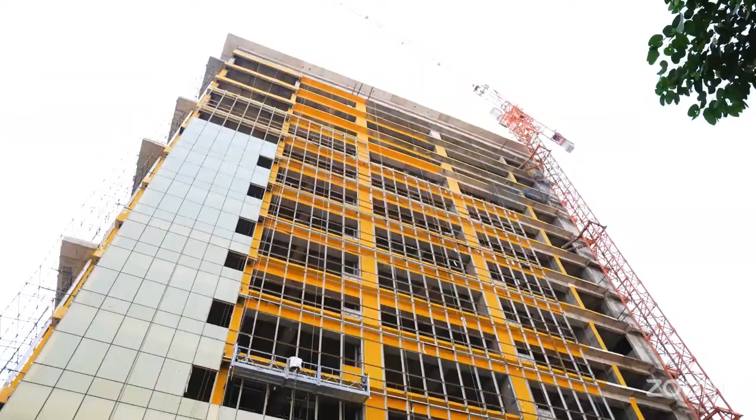The Indian Association of Structural Engineers, also known as IAStructE, was conceptualized and constituted in the year 2002 by a group of senior professional structural engineers from all over the country. IAStructE is registered under the Society's Registration Act 21 of 1860. IAStructE is a national apex body of structural engineers in India with a mission to promote structural engineering profession and cater to the professional needs of the structural fraternity. In the short span of 2 decades, the association has attained an eminent position in the professional field. Its membership is valued very highly in the profession.

Since inception, IAStructE has been led by eminent structural engineers like late Shri Mahendra Raj, late Shri Kumar Ghosh, Shri Subhash Chand Mehrotra, Professor Mahesh Tandon, Shri Alok Bhaumik, Shri Manoj Mittal and Professor R. Pradeep Kumar as its president.

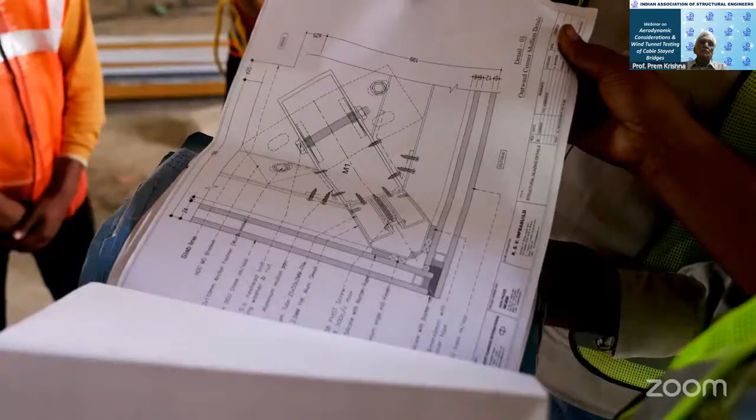IAStructE is a permanent member of Engineering Council of India and interacts with the government on professional and policy matters related to civil and structural engineers. To expand its reach, IAStructE has collaboration with various international professional like-minded associations and institutions.

IAStructE's prime objective is supporting and protecting the profession of structural engineering by upholding professional standards and acting as a mouthpiece for structural engineers in India. IAStructE endeavors to ensure that its members develop the necessary skill in structural engineering and work to the highest standards by maintaining a commitment to professional ethics and standards.

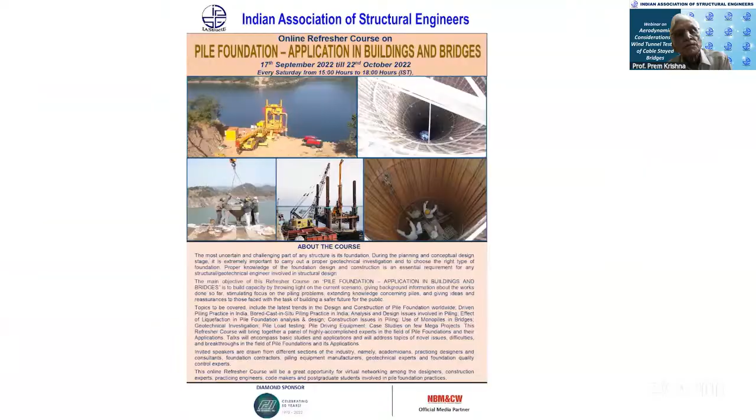IAStructE is actively engaged in organizing several continuing professional development (CPD) courses for structural engineers to help them update their knowledge and advance their career paths. It also conducts refresher courses for young and practicing engineers and student-oriented programs. Seminars, workshops, conferences, technical lectures and discussions related to the latest technological advancements and case studies are also organized regularly for members to enable them to continuously update their knowledge and skill set by interacting with the best minds from the industry. IAStructE's activities are widely appreciated and known for quality technical contents.

IAStructE is also actively engaged in publishing its quarterly journal Structural Engineering Digest (SED), code commentaries, professional guidelines, and a monthly newsletter. IAStructE's publications are becoming popular with time. IAStructE has representation in various technical committees of BIS and IRC as well. Its members are actively contributing to National Code Formulations.

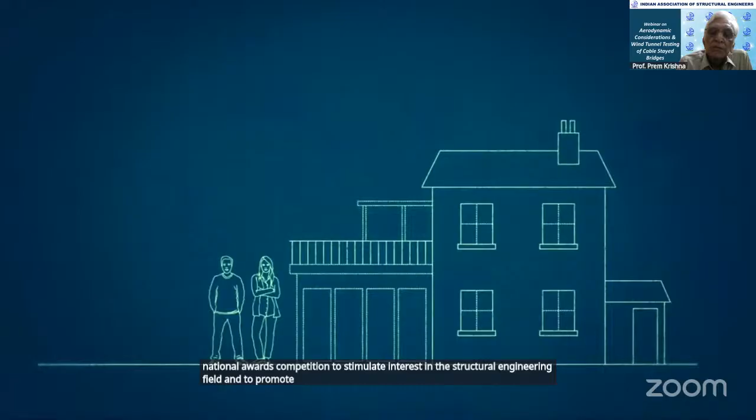In the year 2020, IAStructE started National Awards competition to stimulate interest in the structural engineering field and to promote innovative thinking and creativity. The awards are presented to the winners in recognition of their outstanding contribution to structural engineering in the categories which include Outstanding Structure, Outstanding Structural Engineer, Outstanding Woman Structural Engineer, Promising Young Structural Engineer, and Best Master's Thesis in Structural Engineering.

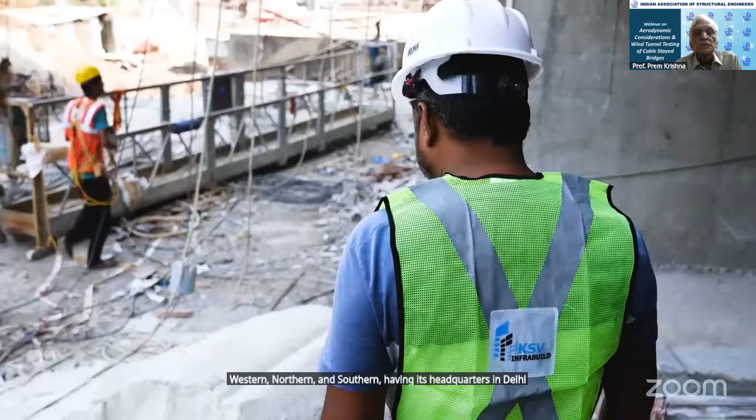IAStructE is currently operating from 4 regional centers, namely Eastern, Western, Northern, and Southern, having its headquarters in Delhi to inculcate the professional culture and provide handholding to the budding engineers. IAStructE has its student chapters in several leading engineering institutions as well.

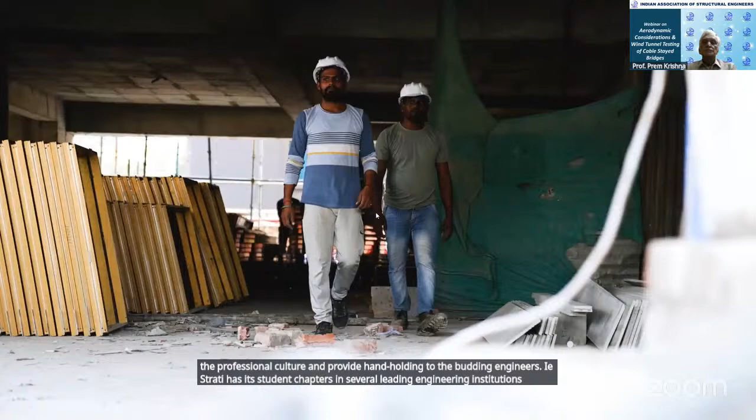Membership of IAStructE is open to all civil and structural engineers engaged in structural engineering profession. Members are elected based on their qualifications and experience in different grades as per eligibility requirements prescribed in the bylaws. Each application is carefully scrutinized before electing the members. More information about IAStructE is available on its website www.iastructe.co.in.

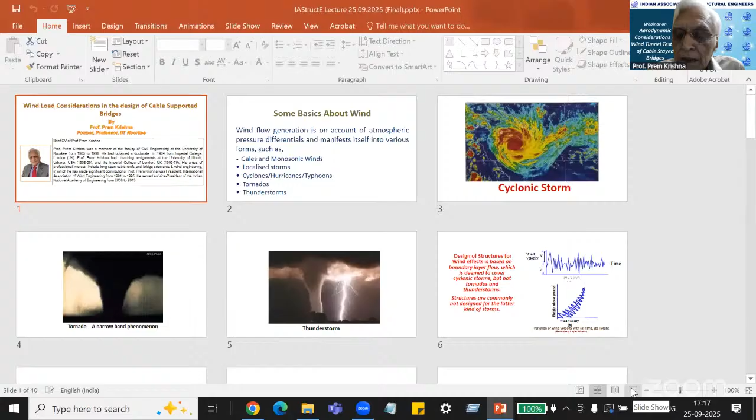The real exciting part will come when Dr. Suresh will elaborate on some of the things that I mentioned, and he will also give you some very interesting information about the wind tunnel testing of cable stayed bridge models. So let me begin. I think that part has been taken care of by Mr. Hegde already. So I go to the next slide.

Well, wind generation is something which occurs over the sea mainly, particularly as far as cyclones and hurricanes are concerned. Of course, there are also inland storms, as I've listed here. All kinds of storms I've listed: gales and monsoonic winds, localized storms and cyclonic winds. Tornadoes are inland development, and thunderstorms.

By and large, as far as India is concerned, we are affected by gales and monsoonic winds, localized storms, dust storms, cyclones. Tornadoes and thunderstorms are comparatively much less of an activity on the Indian subcontinent. So that's generally the various kinds of windstorms that we have. And as I said, of concern to us more are the first three types.

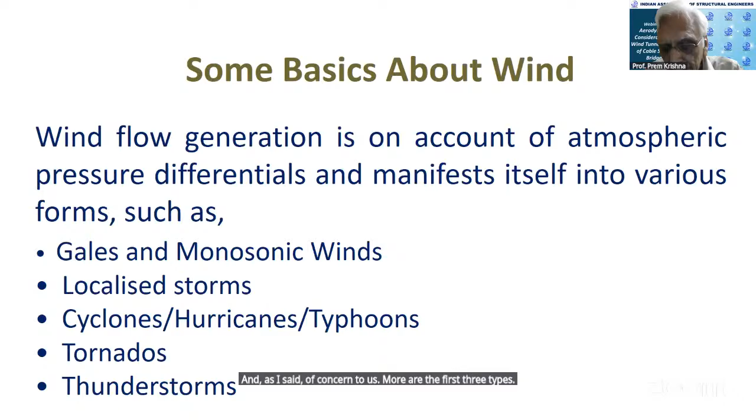Then you have a tornado, which I've called a narrow band phenomenon, which is more or less an inland phenomenon. This also has circulatory motion of wind. The difference between a cyclone and a tornado, very broadly, is that a cyclone is a wide band activity. It can cover an area of 800 to 1,000 kilometers at a time, whereas a tornado is a few hundred meters, if at all. So it's a narrow band activity. Also, it doesn't travel very much, whereas a cyclone has a much wider coverage. And that is why it is of so much concern as far as the destructive capacity of a windstorm is concerned.

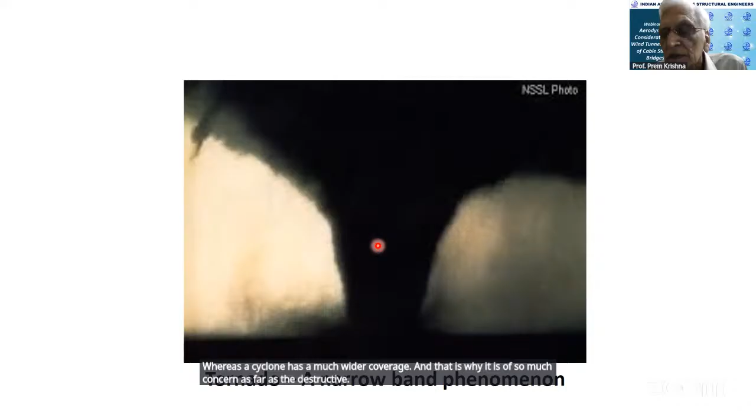On this slide, you will see a trace of wind velocity, which is my patent picture. I've been showing it again and again. If you measure wind velocity at a certain point, this is the kind of trace that you get, fluctuating up and down, above and below a mean line. So wind velocity is a fluctuating phenomenon.

And if you look at the variation of wind velocity from ground upwards, then you get a mean like this, as shown here, and up and down about this mean is of course a fluctuating component. But mainly I'm showing this figure to show that this is the way it grows from the ground towards a certain height, which we call the gradient height. The gradient height will vary and it will depend upon the type of approach terrain that you have. It may be 200 meters above ground, or it can go up to 500 meters.

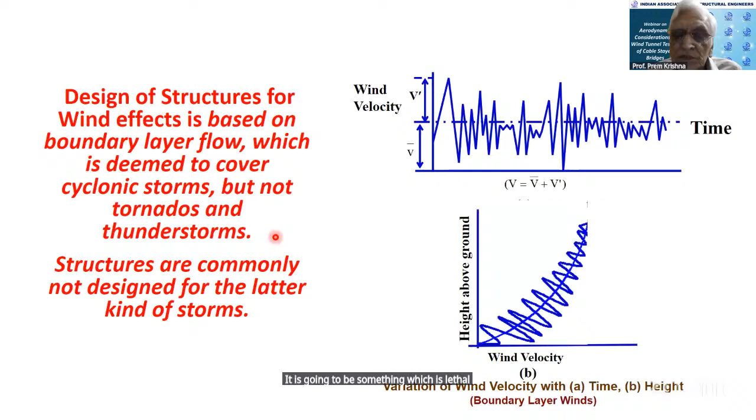So, as you have noticed from that graph there, wind is a natural randomly varying dynamic phenomenon which evokes a dynamic response from any structure, big or small, when it obstructs the flow of wind. The only difference is that for stocky structures, the dynamic component is small and it may even be negligible. And therefore, you can go for a quasi-static design approach for stocky structures, small in height and wide coverage.

The more flexible, longer span structures, such as the ones that we are dealing with today, cable bridges, depending upon their span, will exhibit dynamic response, and this dynamic response is substantial. And such structures are termed as wind-sensitive structures. So you have two types: stocky structures, which will exhibit much smaller aerodynamic response, and wind-sensitive structures, which have a predominantly aerodynamic response, which we have to take care of.

In general, this is a very simple equation that we see here. The force due to wind is obtained as a coefficient C multiplied by the pressure multiplied by the area on which the wind is impinging. P is equal to half rho v squared. Rho is the mass density of air. V is the velocity with which the wind is impinging on the structure. And this is something which we can get from the Indian Standard 875. The values of wind velocity for different zones in the country are specified in the Indian Standard 875.

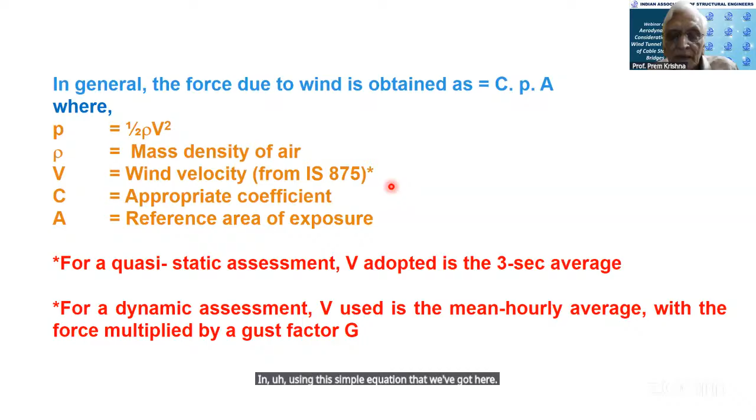The design of cable bridges is an iterative process, just like any other structure. You know that. You assume certain sizes, you assume certain forces. In fact, on that basis, if you have the sizes, then you can estimate the forces. Forces are specified. And then when you design the structure, there may be need to revise the design. So this is the process of any kind of structural design that I'm mentioning in a general way.

So can I get, what happened there? What exactly you want, Professor? I think I'm seeing your screen. It has come in front of my slides. My screen, I have not shared anything. You can request multiple presenters to share. Also, you can go to the view option, maybe it has changed. We are able to see your PPT, by the way. Yes, PPT is visible. I can't see my people. I think you can stop sharing and share again. I'll stop share and share again. Okay, yes, that would be better.

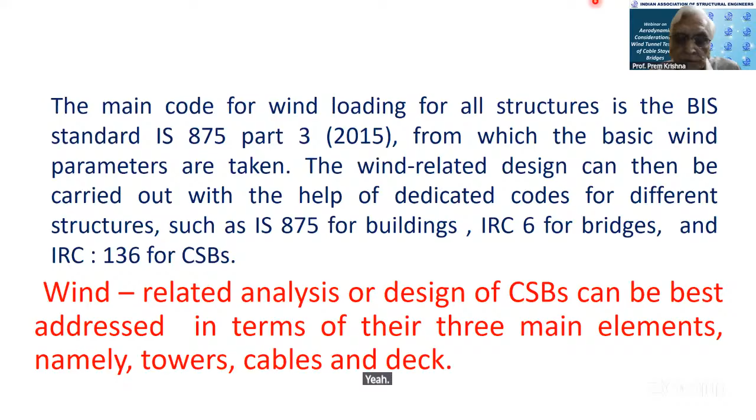Towers first. Wind effects on towers can generally be treated akin to any tall tower, as per the provisions of IS 875 Part 3. For short or stocky towers, satisfying the conditions given below, height upon lateral dimension less than 5, and frequency of vibration more than 1 Hz, a quasi-static approach is followed. And you saw that equation which I shared with you earlier that can be used. The various kinds of coefficients can be found in the code.

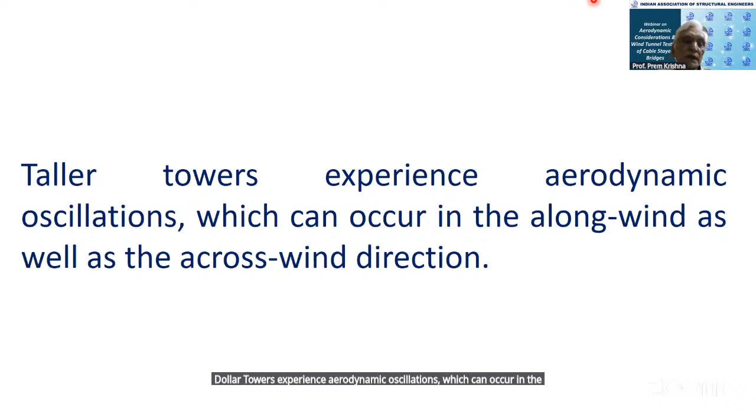Taller towers experience aerodynamic oscillations, which can occur in the along wind as well as the across wind direction. We have a picture here that will indicate that. If wind is blowing in this direction, then this is a crosswind oscillation occurring here. And this is the along wind response.

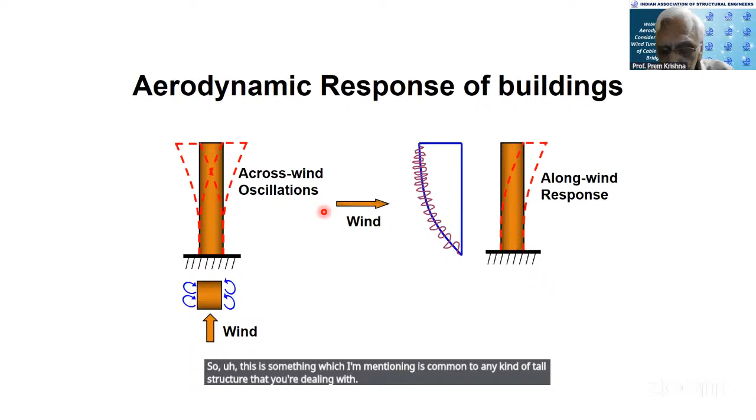The along wind response for towers, chimneys, and structures like that is monotonic in one direction, and the across wind oscillations are across the axis of the structure. So this is how this oscillates, and both can be very important for the design of the tall structure. This is common to any kind of tall structure that you're dealing with. Then we come to cable stays, which are special to cable stayed bridges.

The dynamic response for along wind is computed on the basis of the mean hourly wind velocity and is multiplied by the gust factor G using formulations given in IS 875. The dynamic response for the crosswind direction is computed by using formulations likewise given in IS 875.

It is noteworthy that towers in cable stayed bridges particularly should be examined for their safety against wind at different stages of construction. This is very important, that a cable stayed bridge, being a long span, flexible structure, as it goes through the various steps of construction, has to be examined for its safety against wind, both static as well as aerodynamic.

Now, wind-induced cable vibrations. If it were a matter of a short cable, of course, you can again go back to that same basic equation and compute the force on the cable. But in cable stayed bridges the stays can be pretty long. Just to share a figure with you, suppose you have a 1,000-meter span cable stayed bridge. The length of the cable could be as long as 600 meters. So imagine the length of the cable.

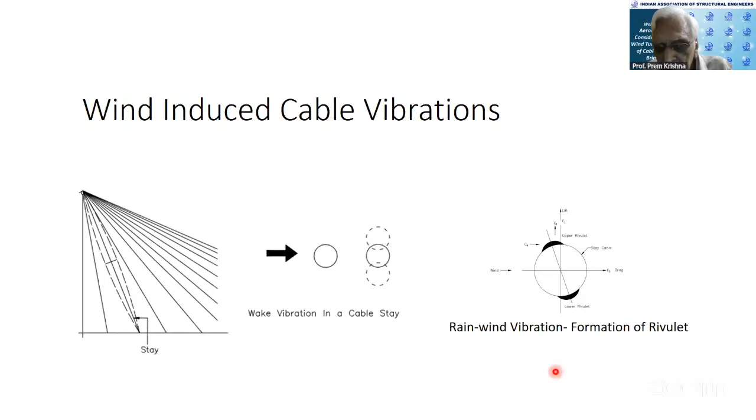Let us just see certain more stipulations about this. For short cables, I have repeated the equation that I've used above, only except to say that the appropriate coefficient we were talking about, C, is here the drag coefficient, and the value of this drag coefficient is between 0.7 and 0.8. Now, for longer cables, as I've just mentioned, what we use is the mean hourly average with the force multiplied by a gust factor G, and the order of that gust factor is 1.2. So that is how you can compute the forces on a cable due to wind.

Now, rain-wind oscillations occur when typically the frequency of vibration of the cable is between 1 and 3 Hertz, the wind speed is between 3 and 18 meters per second, and the angle of incidence is 30 to 80 degrees from perpendicular to the cable. So these are broadly the guidelines of the frequency of vibration, the speed, and the angle of incidence. And if these are satisfied, then you will expect to get rain-wind oscillations.

Rain-wind oscillations can be avoided if the Scruton number is greater than 10 for smooth surfaces and is greater than 5 for textured surfaces. Sometimes the surfaces of the cable are textured, and in that case, if the Scruton number is greater than 5, then you do not expect to get rain-wind oscillations. It is advised in the IRC 136 that cables longer than 80 meters should normally be checked for the possibility of rain-wind oscillations.

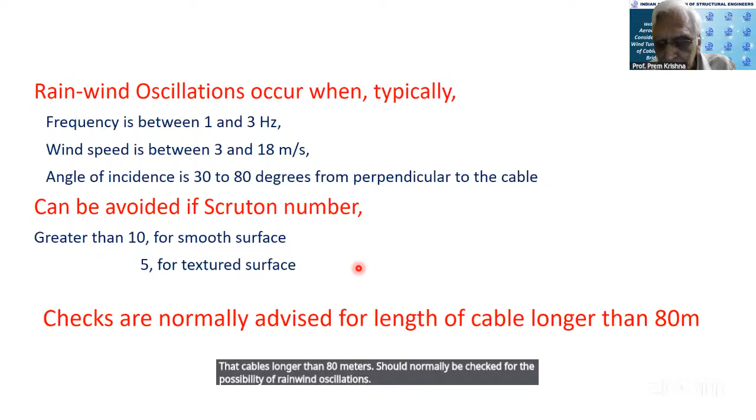Wake galloping, like the one I've shown in the slide there, is likely to occur when the distance between the cables is between 2 to 5 times the diameter. And if the distance is not in this range, then it is unlikely to occur. So that's the wake galloping.

Now we come to the deck. And if I may say so, and I think Dr. Suresh will also emphasize this in great detail, the aerodynamics of the deck in these long span bridges, the cable stayed bridge types, is perhaps the most important aerodynamic phenomenon for cable bridges. And it is there that much of the attention is given to ensure that the bridge will remain within safe limits as far as aerodynamic effects are concerned. It is not that you ignore cables and towers, but the deck is perhaps the more important element of a cable stayed bridge, which has to be examined from this point of view.

The bridge deck has three prominent modes of vibration: vertical, transverse, and torsional. Often also in cable stayed bridges, the frequencies of vibration can be very closely spaced. And coupling of flexural and torsional modes of vibration, if they are close to each other, can lead to the possibility of flutter. And in examining decks for aerodynamic stability, flutter is a very important word. You have to avoid it like you avoid taking poison.

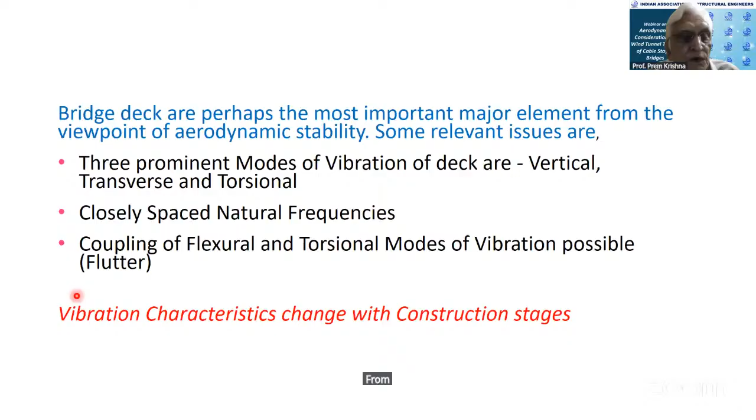As I mentioned earlier, vibration characteristics change with the construction stages. And therefore, the checking on the stability of the bridge from the wind point of view has to be done at different stages. Wind forces on a typical bridge deck, these equations are given here: the drag, the lift, and this is the torsional moment. And this is the simple equation, which is more or less a repeat of what I've written in earlier slides.

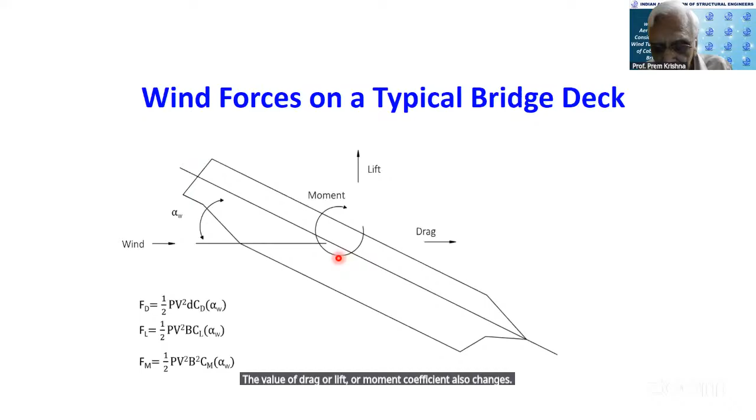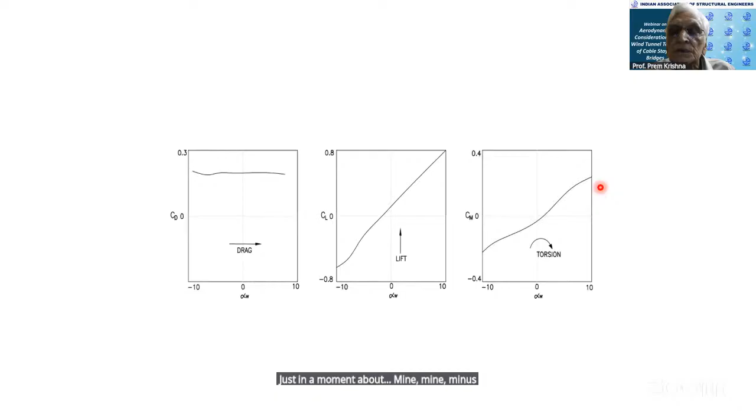Here, for a deck, the variation of drag is given. This is how CD varies with the angle of incidence alpha W. So as this changes, the value of drag or lift or moment coefficient also changes, and the variation is given here. From minus 10 degrees to plus 10, it varies from about minus 0.85 to about 0.8 here. Torsional moment from about minus 0.2 to about plus 0.2. The drag about 0.2. This is the variation for a typical case. Don't say that the variation is going to be the same on all kinds of decks. This is for a typical case.

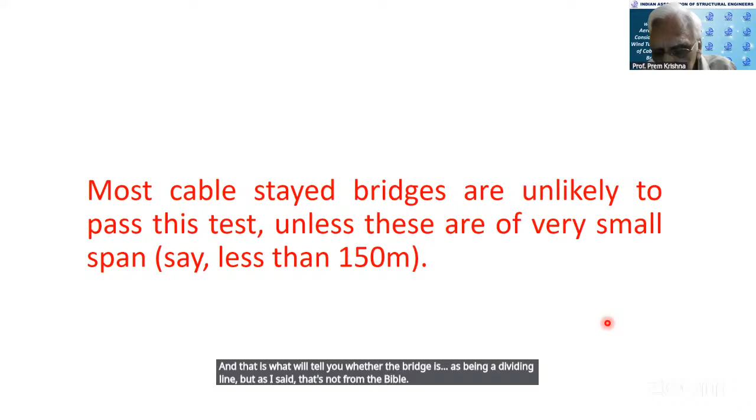If the possibility of aerodynamic actions is indicated, you carry out a dynamic analysis of the bridge, if perhaps you have not carried out already. Vortex-induced vibration amplitudes, flutter speeds, etc. can be computed at this stage using IRC 136. And design modifications can be introduced at this stage also, if necessary, to make the design more acceptable aerodynamically. So that's the first stage.

Then you have these equations, which I think Dr. Suresh will be talking about. From this, it is stipulated that if this parameter PB is between a certain range, the bridge is prone to aerodynamic oscillations. If it is greater than 1, then the bridge is highly susceptible to aerodynamic oscillations. And if it is less than 0.04, it is not susceptible.

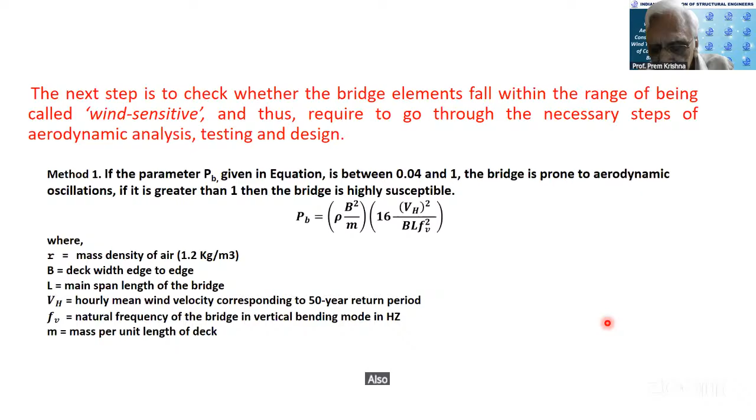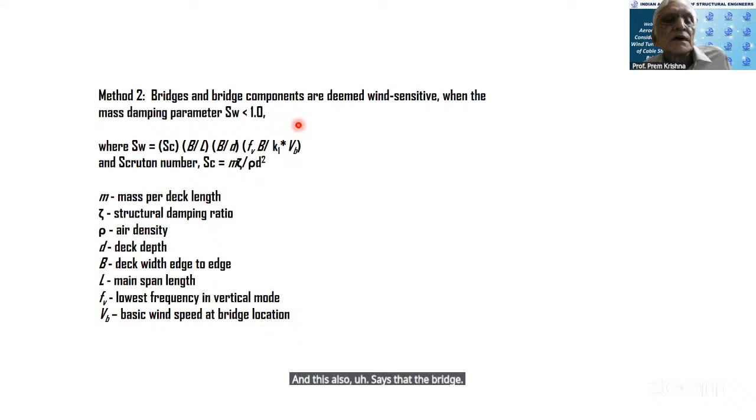Also, another method is given. And this also says that the bridge components are deemed wind sensitive when the mass damping parameter SW is less than 1. So these two empirical expressions can give you an idea of what to expect as far as the aerodynamics of the bridge is concerned.

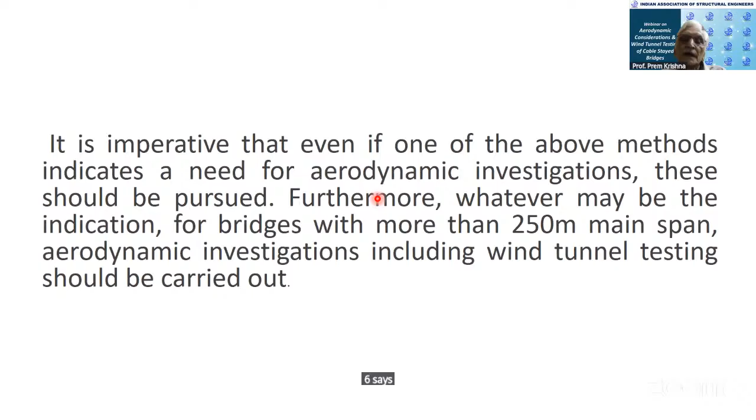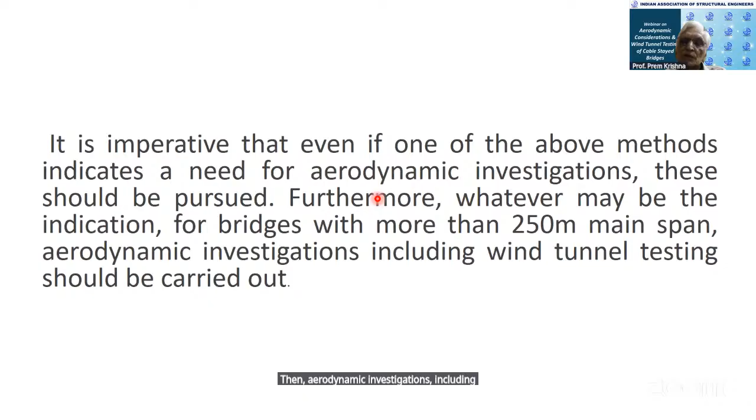Now the IRC 136 says that even if one of the above parameters indicates aerodynamic sensitivity, then further investigations have got to be pursued. Furthermore, it specifies that whatever value you get from those equations, if the span of the cable stayed bridge is more than 250 meters, then aerodynamic investigations, including wind tunnel testing, should be carried out. That is what is specified in the code.

Also, if a bridge site is windy, such as locations on the coast of India or the hilly regions where deep valleys can experience accentuation of wind speed, it will be prudent to carry out a wind climate assessment, which will provide more detailed information on the wind climate around the bridge site. The project should, in such cases, consider aerodynamic investigations, including a wind tunnel study, even for spans less than 250 meters. The intention is not to err on the wrong side. If you have to err or do more effort, you go to the safer side.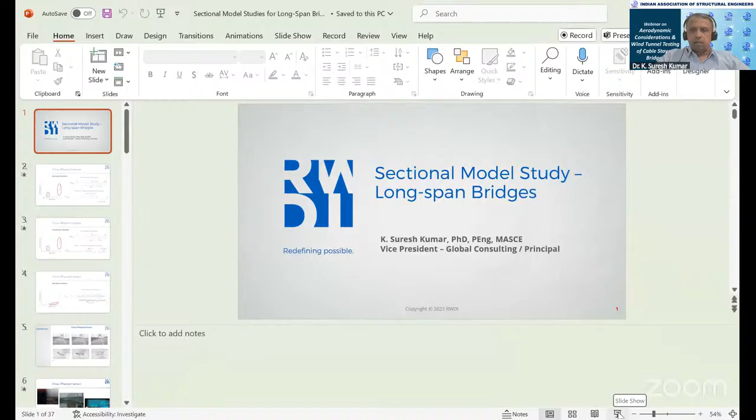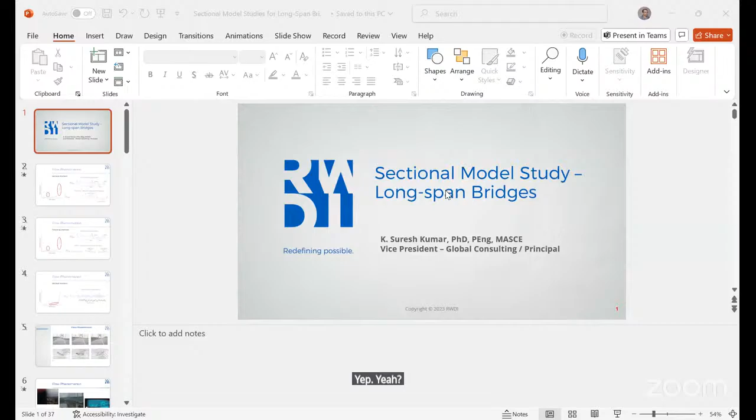Thank you, thanks everybody, I hope you can hear me. Thanks for the kind introduction and for remembering our days for Anji Khad Bridge, which is long back. It's a great honor to present after Professor Prem Krishna. He's the one who asked me whether I can join with him, so why not, I wholeheartedly agreed. Let me open my presentation. I'm going to be quick probably, but let me see. You can see? Yes, we can see. You can go to the presentation mode. It's not gone yet. Perfect, yes, okay.

So I'm talking mostly on section model studies on long-span bridges. I'm not going to be talking about aeroelastic modeling or anything like that. This is a fundamental test, and I thought probably this is the best to talk about in this forum.

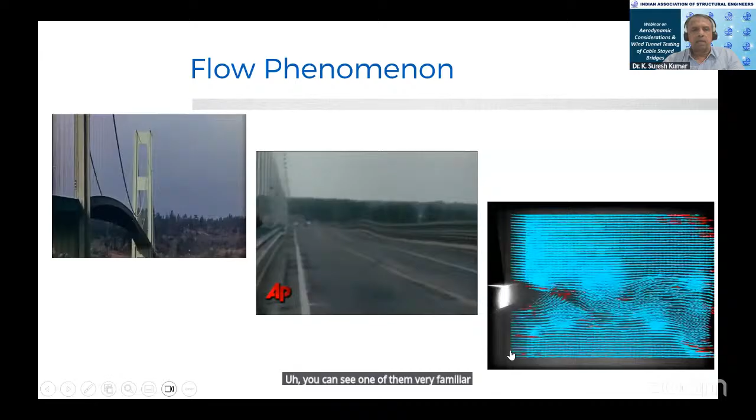Before I do, I just want to show you why we are doing such testing, with a few videos. One of them you might have seen already a number of times - that's a flutter which is happening on the Tacoma Narrows. The other one is another bridge, I forgot the name of it, it's in Russia, which is undergoing vortex-induced oscillations. The last video is showing the testing - while we are doing the testing, some oscillations are happening.

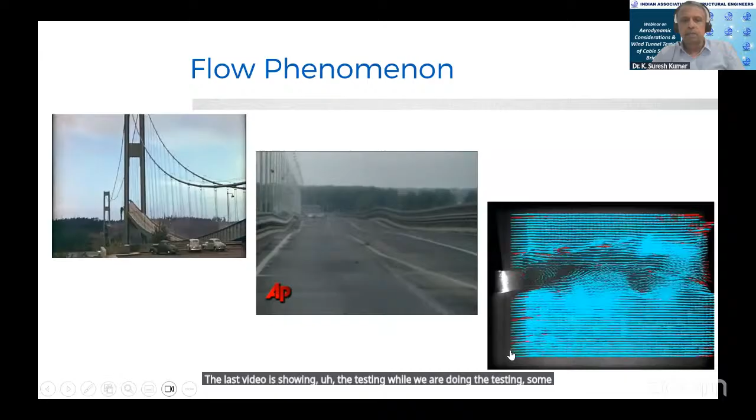So basically, all I can say is, those who are in wind engineering, bridges are quite different compared to tall buildings. Whatever you see or experience on bridges is not going to happen in tall buildings. I'm not going to get into why tall buildings are not subjected to such unstable motions today.

When to consider wind study, I think Professor Prem Krishna already covered, so I'm not going to talk too much on this as well. Basically, footbridges spanning more than 60 meters, highway bridges more than 100 meters are typically being tested, then fundamental period higher than 1 second and things like that. But there is no clear cut - it's not written in stone. There are reasons sometimes you may avoid some testing as well. So best is to consult with a specialist so that you can do some planning right from the beginning.

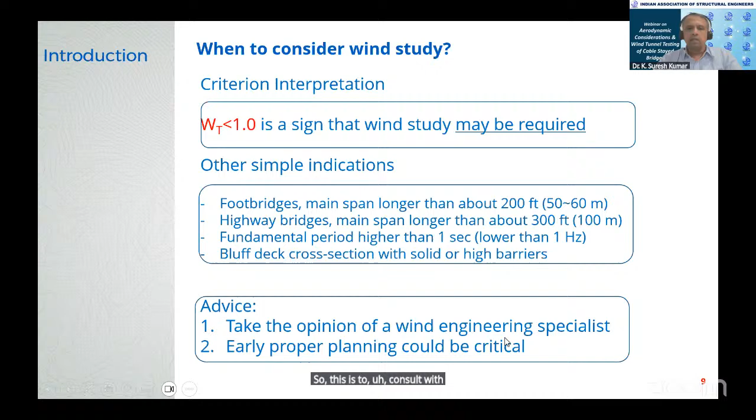The essential in wind engineering studies, I thought this is something you cannot avoid when doing bridges. One is wind climate analysis. Especially when you are in hilly terrain or something, you need to know what is the speed at which the bridge should be designed, which is not very clear from the codes. So you need to pay some attention to this - maybe your speed is higher or your speed can be lower. In Anji Khad Bridge, I vividly remember our speed was higher than what is in the code. So you need to be careful with the effects of topography on wind speeds.

The second thing you need to do is at least a desktop stability assessment, because you need to make sure that your bridge is going to be stable for vortex shedding, galloping, and even flutter. If you're doubtful, then you move into section model test to confirm it. You need to verify, and if there is a problem, you need mitigation measures. I'll show some of those today. And then lastly, buffeting analysis will utilize some of the data from section model test, and then do analytical simulations to get the responses and load distributions, because that's ultimately required for the design of the bridge.

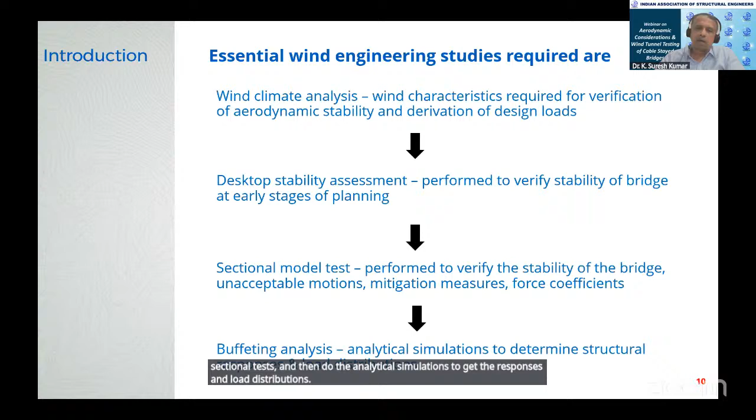So here you go, section model test. In section model test, there are criteria you have to look into, like flutter. I'm using IAStructE criteria here. I think most of you working in bridges will know this. For construction, you need to pass beyond 1,000-year return period speed. For completed stage, you have to pass beyond 10,000-year return period speed, which looks awfully high. But Prof. Prem Krishna already discussed that you don't want any issue with your bridge, because if flutter comes into the picture, it will basically break the bridge. That's why the return period is set very high, so there's no chance this speed will occur and your bridge will be stable. But you're not designing for 10,000 year - you're designing for 100 year, or even some ultimate limit state design, maybe 1,700 year return period maximum.

Then in vortex shedding too, there are criteria. You need to be within certain acceleration limits. Up to 13 meters per second, you should be within 5% gravity. Then up to 22 meters per second, you have to be within 10% gravity. These are criteria already set - I'm picking these from IAStructE. If these things happen beyond 22 meters per second, then it's not anymore a comfort issue - it's more of a strength or fatigue issue. So that needs to be treated separately.

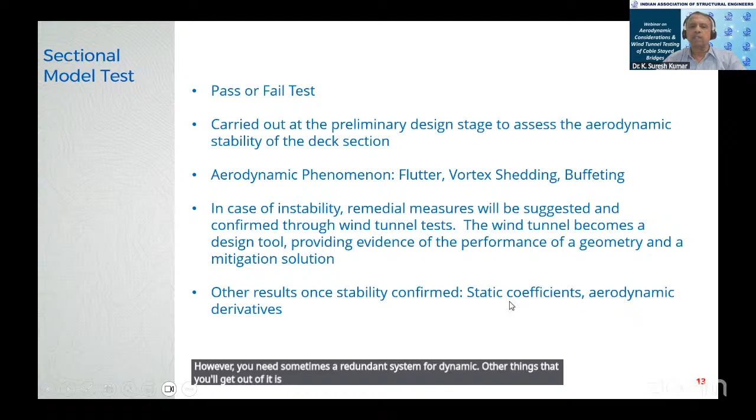Other things you will get out of it are static coefficients and aerodynamic derivatives. Typically you'll pick a section of the bridge - you won't test the entire bridge. You'll pick only a section, around 100 meters or 120 meters. In case of non-uniform decks, this is something to be discussed - which section you want to test. Sometimes you may have to test multiple sections in non-uniform deck sections. But most long span bridges are quite uniform, so most of the time you can pick the center section.

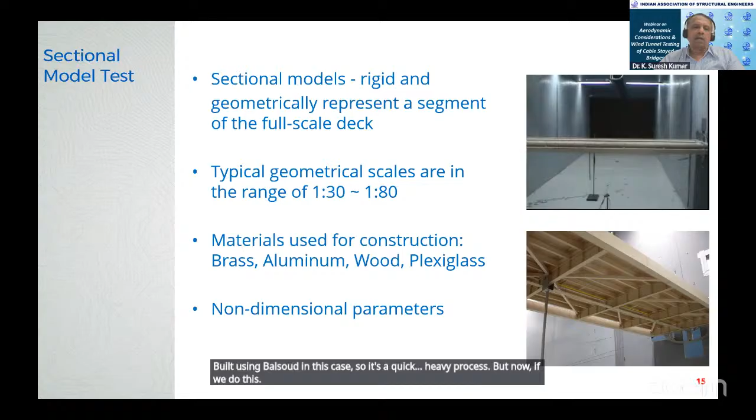As far as the modeling is concerned, geometric similarity, kinematic similarity, and dynamic similarity has to be followed. This is not Froude number scaling, this is simply LVT scaling. You can scale the length, velocity, and time separately, which is a very high advantage compared to Froude scaling, because Froude number scaling you had to do in an aeroelastic test, not in a section model test. So you do this depending on the size of your tunnel, because the tunnel might have a particular velocity up to which you can do the test. So then you know the full scale velocity from which you can get the velocity scale. You have the length scale, then you can get the time scale. From time scale, you can get the frequency scale, etc.

And the damping needs to be exactly the same. Nowadays we are doing the damping using magnetic dampers, and the frequency is simulated using springs.

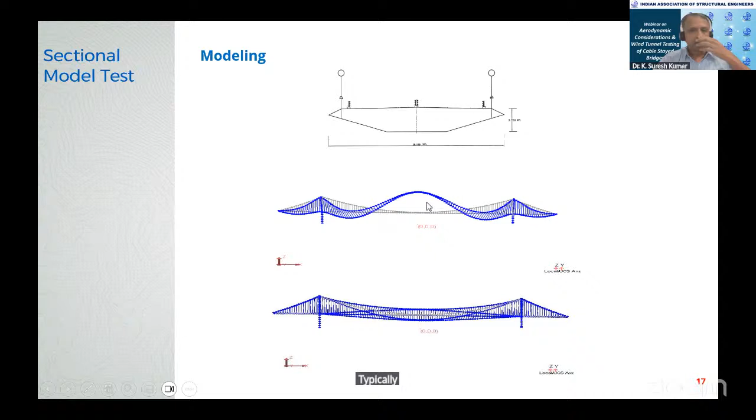I'm just showing you one of the box girder bridges where you can see what is going on. These are the modes we have selected. Typically you'll select the first vertical mode and the adjacent torsional mode. I'm showing the key parameters in the section model, full scale versus 1:60 model of what we simulated, the vertical frequency in full scale versus actual, etc. What is important is the frequency ratio, that torsional to vertical should be the same both in model scale and full scale.

Here the ratio is 2.87, that has been simulated. If you look at the deck mass, this deck is around 15.4 kilos, so it can be fairly heavy. The deck mass moment of inertia has to be simulated as well. Vertical damping is around 0.25% and 0.3% torsional damping.

This is the response we got. We are plotting peak vertical deflection versus peak torsional deflection. You can see there is a blip at a very low speed, there is vortex shedding, however it is still within 5% of G, so it is not a great concern. However, the deflection is quite huge, like 0.5 meters. This is a very long span bridge, so this is not a good deflection for a span of about a kilometer. So we asked them to relook at the shape again.

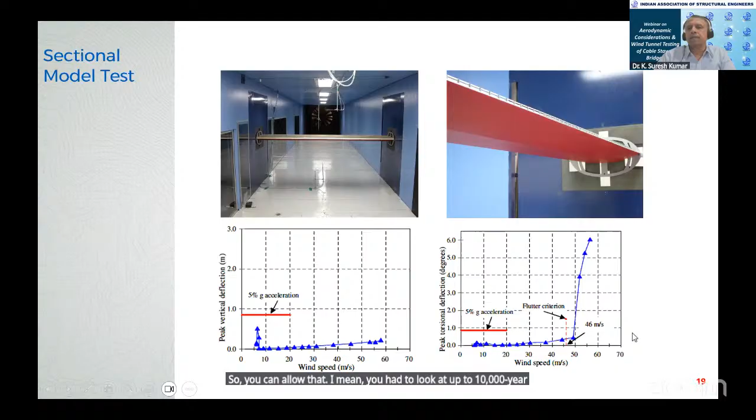But when you look at the peak torsional deflection, you can see there is no blip, so it is all clear within 5% G. But there is flutter happening, though the flutter is happening after the flutter criterion, so it is not a concern because this is passing the 10,000 year criterion. So you can allow that. You have to look at up to the 10,000 year return period; beyond that, you can get into flutter.

If you have any issues, you look for changing the shape, like I said before, end fairing to make it more aerodynamic, like triangle pieces attached to the bridge. You can also have baffle plates underneath so that it disturbs the vortex shedding happening above versus what is happening underneath. With these techniques, you can bring down these exceedances above certain criteria, 5% G, 10% G, sometimes it will exceed, so you can bring it down using these simple techniques.

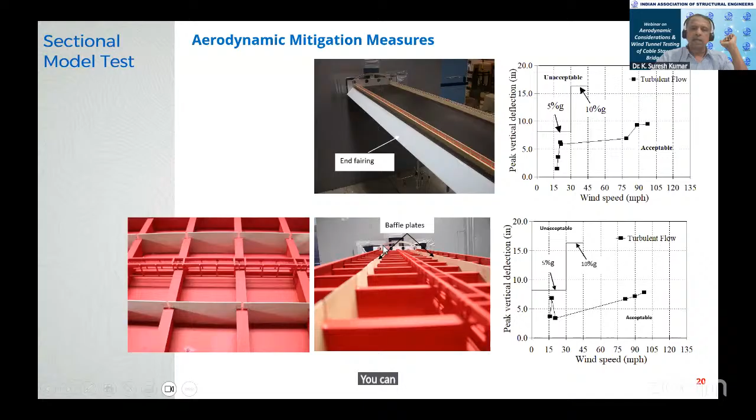This can be found out at the time of the test. When you do the test, you can attach these elements and prove that it is within the limits. You can also use guide vanes, you can see this little piece at the edges which will basically deflect the flow. It allows the flow to go through the bridge and the guide vane in between, and also it is outside, so that basically you are disturbing the vortex shedding coming out to that edge. You can use simple techniques like this.

We have used it, and I'm going to show some of those examples. This is a bridge in India which we have done, a double deck, side by side. We have tested this, not in India, but tested abroad in Canada.

So you can see again inside what is going on. There's a lot of details. So you have to be simulating everything exactly according to the scale. So you cannot avoid anything, including the parapet. Okay, whatever the porosity of the parapet, that needs to be simulated as well.

This is a fancy rig system because you have to hang this bridge on a spring system. So you'll have vertical springs and you have torsional springs. Both of them will create the torsional frequency and the vertical frequency, and also the ratio that you're looking for. And then the measurements will be taken outside of the tunnel. So you'll have a laser system pointed to pointers so that you know the motion of the bridge on either side of it. So you have all kinds of measurements which can be done on this bridge.

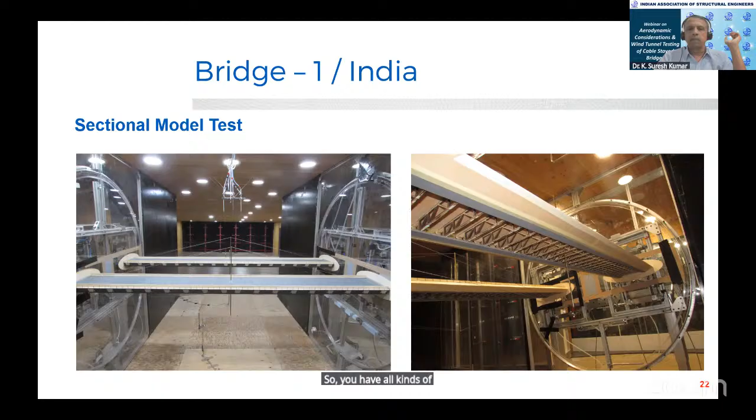I have a few videos. You'll be interested to see some of these. This bridge had some trouble. So one is the vertical vibration, and also you can see the torsional issues. It looks like we are trying to vibrate it forcefully, but we are not doing anything. The wind is doing the job. But when you change the speed, it will go to no oscillation. So it is purely vortex shedding. This is not a flutter issue.

If it had been a flutter issue, we would have stopped the test by now because it will fail the model. Okay, so you need to know where you're expecting your flutter and where you're expecting your vortex shedding. You can do some calculation in advance. So you are expecting certain things at a particular speed.

This is another bridge in India we have done. So here again, it's a long span bridge, not really long span, 75-meter span, but there are a number of 75 meters. So in total, it's about a 1.2 kilometer bridge. So this bridge had some issues as well, vertical vibration. And then we had to put guide vanes underneath it to arrest the motions.

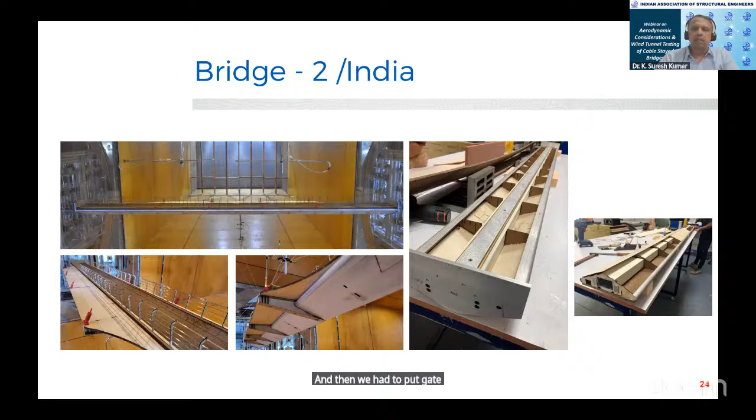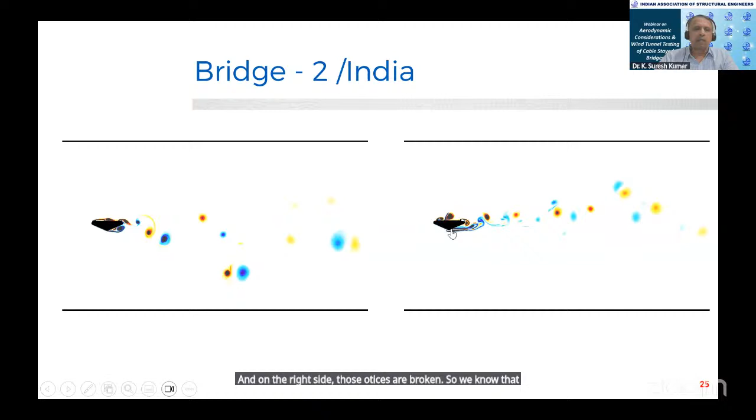At the beginning, we have done some CFD simulation to see whether this guide vane is going to be helpful. You can see there are large vortices here on the left side, and on the right side, those vortices are broken. So we know that this is going to work. So after seeing this, we have done the test. So during the test, you can see what is going on.

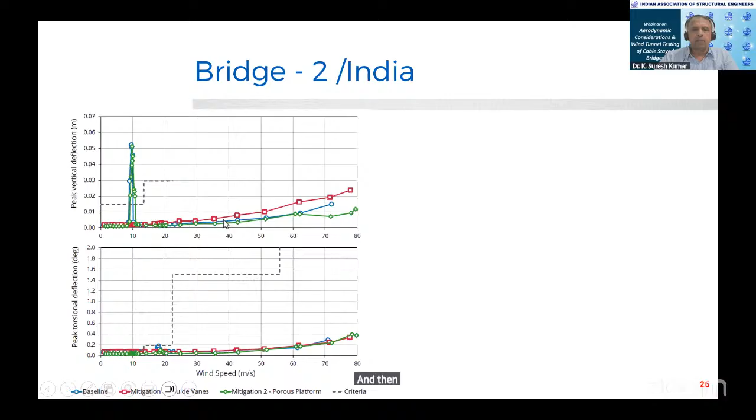So these are very large spikes, peak vertical deflection. And then with the use of that mitigation, we could reduce the response significantly. Those are the red ones. There is no spike at all. So that one you can see here. This is the vibration we have noticed in that particular bridge. You can see again, this is hung on springs and simulating whatever we have been looking for.

And then finally, if you look at this guide vane in this diagram, underneath the bridge, we were able to bring this oscillation down significantly and within limits. In fact, there is no torsion oscillation. Torsion is within limit. There is no flutter issue on this bridge. So it's all about vortex shedding.

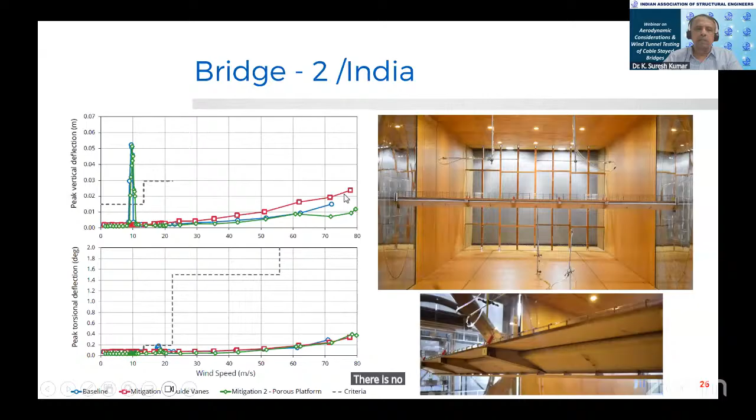When you talk about force and moment coefficients, this is primarily static stuff. And when you get into dynamics, you can get aerodynamic derivatives. This is primarily when you are blowing wind and the bridge is in motion. Its stiffness as well as damping can get changed depending on the speed. So this is talking about system damping and system stiffness according to the reduced velocity or reduced frequency.

There are 8 derivatives, H1 to H4 star and A1 to A4 star. When the derivative is going in the negative direction, this is going to give you positive aerodynamic damping. When it is going above, then that is going to give you negative aerodynamic damping as well as negative stiffness. Negative stiffness means your stiffness is being taken away when the wind is blowing against the bridge. So this is very important information which we will get out of the section model test. And this will be utilized when we are doing the buffeting analysis.

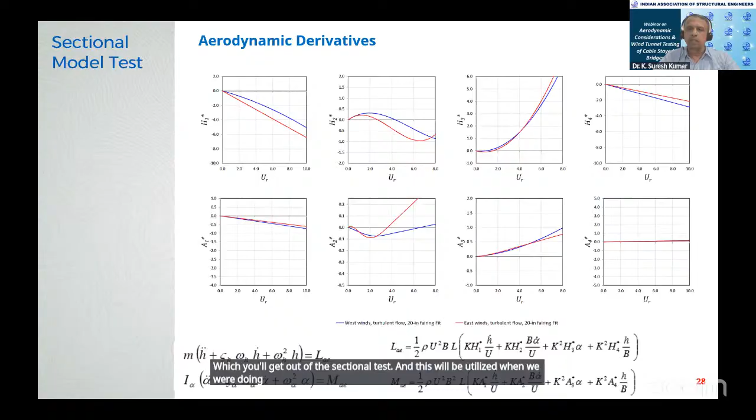You can see the middle barrier was a little at the beginning, but we asked them to increase the middle barrier to 1.6 meters. Plus, we also used baffle plates underneath. Through these two things, we were able to solve the problem. And then again, this will be confirmed through the test. We cannot just say that this will work and leave it. We have to confirm it through the test, and that's what we have done.

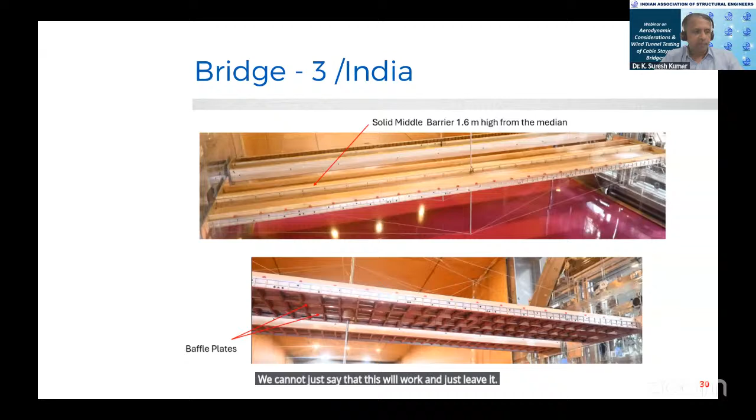You can see the vertical VIO, and the mitigated one is the red line. There's nothing there, through that middle barrier as well as the baffle plate. And you can also see there's a torsion VIO. Even though it is not exceeding the criteria, it is quite large. So through these mitigation measures, we are able to bring it down. So these are wonders one can do when you change the shape of the bridge. At the beginning, you may not know whether it is really required or not.

However, the rule of thumb is when your deck section is very blunt, likely you are going to get all of these issues. Because most of the bridges I am seeing nowadays have a blunt shape; right at the edge there's a large girder, blunt. And then this can happen. Likely it is going to happen. And that's what happened in some of these bridges.

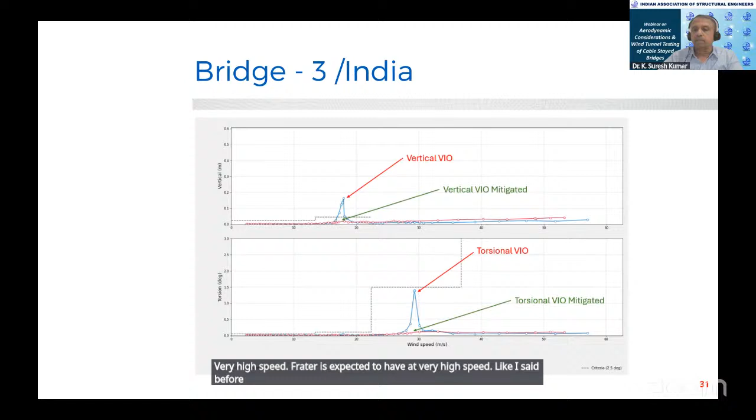In certain cases, even if it is aerodynamically nice at the beginning, like the second one I showed, if you look at it, it looks like a nice shape. However, it had some issues too, so we had to use guide vanes underneath the bridge to get rid of this vortex shedding issue. And none of these bridges had any flutter issue, fortunately. You can see it is going almost flat at very high speed. Flutter is expected at very high speed. Like I said before, we check up to the 10,000 year return period speed, and if it is passing, then the bridge is passed.

You can see some of the interesting designs we have done. These are dedicated modeling. Like I said before, the weight needs to be matched, the stiffness through the springs, the weight and the shape through the actual model. And then the springs give you basically the stiffness, and the damping comes from magnetic dampers. Together it works as a section model.

You can see some of the equipment we are using. These are quite significant systems we have developed, where you have vertical springs, horizontal springs, and also a damping system and all the measurement systems, including lasers, etc. This is outside of the tunnel section, sitting outside, and the deck will be inside the tunnel.

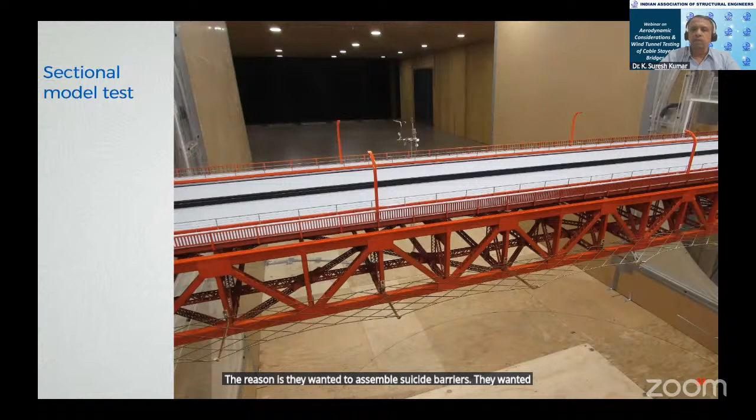This is an interesting project. This is the Golden Gate Bridge in San Francisco. You might be wondering, this bridge was already built in the 1930s, and recently it came for a test. The reason is they wanted to install a suicide barrier, and then the aerodynamics of the bridge got changed. So, like I said, any small thing that you do to some sensitive bridges can change the aerodynamics significantly. So one should be very careful.

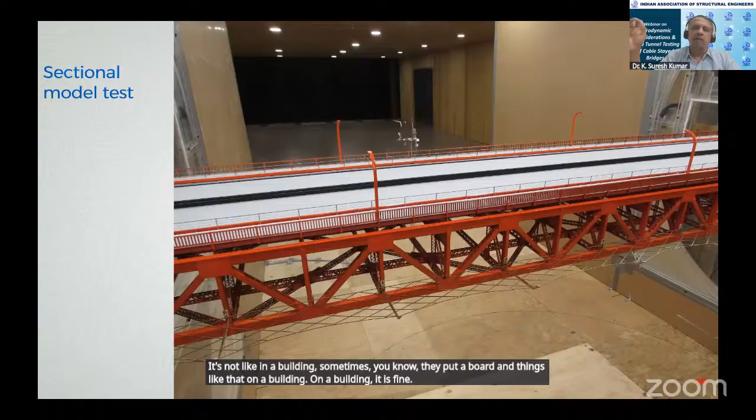It's not like a building. Sometimes they put a board and things like that on a building. On a building it is fine, but it's not fine for a bridge. The bridge will have an issue as far as aerodynamics is concerned. So you can see this is the Golden Gate Bridge. When we tested, we found some interesting motions. These are some of the modes that we were looking at, mode 2.086 and mode 7.189.

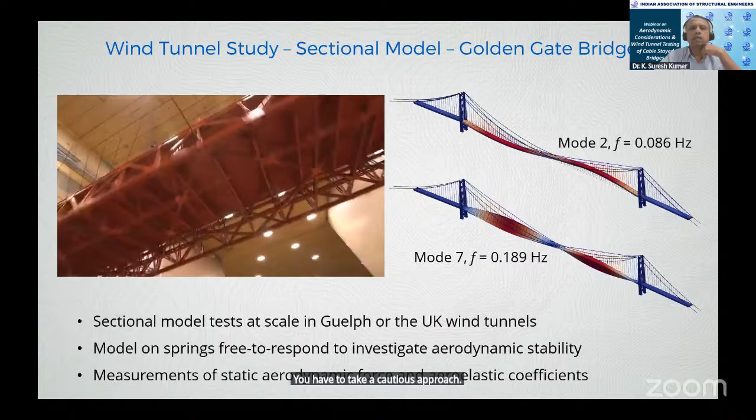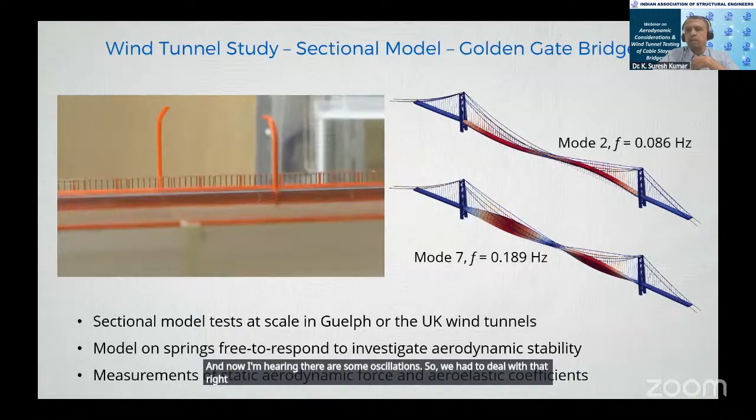So any time you want to change a section of the bridge, you have to take a cautious approach. Recently, I'm hearing of some incidents from India as well, which I'm not going to share here for confidentiality. Exactly the same thing happened. Without consulting, they tried to change the shape of the bridge, and now I'm hearing there are some oscillations. So we have to deal with that right now, how to get rid of those oscillations. And sometimes bridges are tested including the traffic on the bridge, and this can change the aerodynamics completely.

This particular test, I think we have been doing near the border. So at the border of Canada and US, there's a bridge where the traffic at times is quite heavy. And at the same time, when you are getting very high wind also, you can have some problems. So that's why we looked at these cases separately: what is going to be happening to the stability of the bridge, including the traffic.

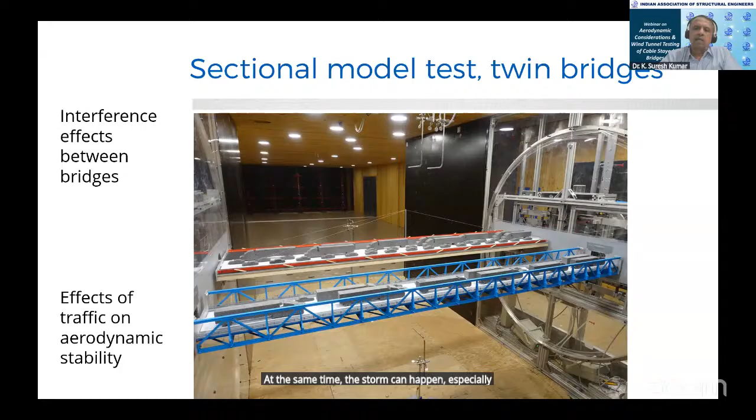The traffic is almost dead because this is immigration right after this, so everybody is in a queue to pass. At the same time, the storm can happen, especially in Canada. There are winter storms, so it can happen at any given point. And so this testing of two deck sections at the same time is a very important test, because sometimes you may think that, okay, I can make one bridge kind of dead, like a dummy model, not moving.

The other bridge is like a moving model, which is not a good idea, because there is something called aerodynamic coupling between the two. In order to have the aerodynamic coupling, I think both models should be moving. So we have a facility where we can do two models at the same time. We can have different separations as well. I don't know what is the extent we can go, but a normal extent of the gap can be maintained, like 20 meters, 50 meters, and we can study the aerodynamic coupling between the motion of the bridges.

So I think these are what I would say are the basic tests that one should be doing if your desktop assessment is saying that the bridge is going to have some trouble. In such cases, you need to prove that the bridge is going to be stable. And if it is not stable, you have to assemble certain mitigation measures so that you can make it stable.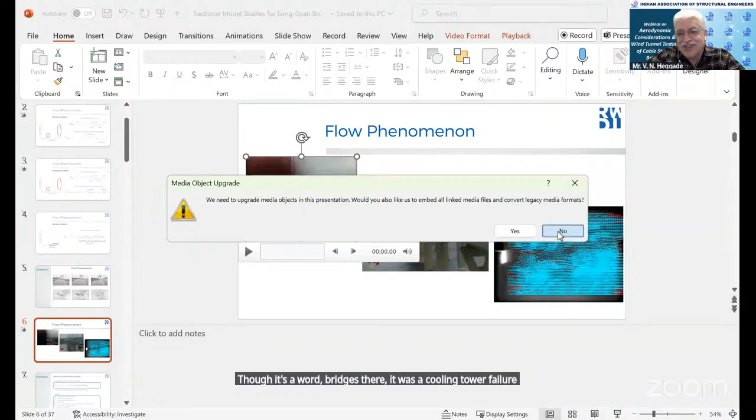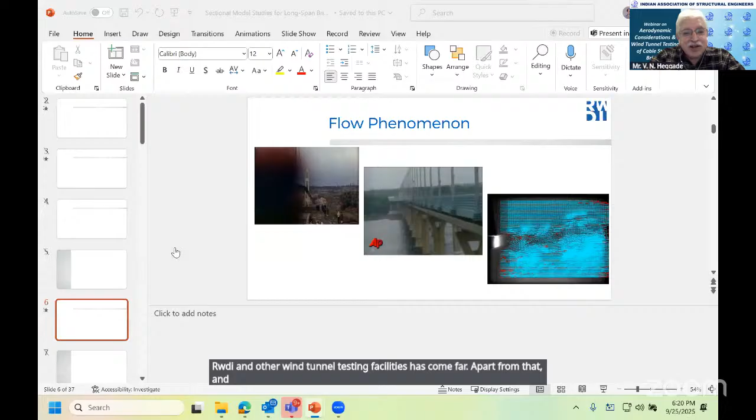And we have come very, very far from those two famous failures in engineering: the Tacoma Bridge, that happened on November 7, 1940, and the Ferrybridge cooling tower failure. Though the word bridge is there, it was a cooling tower failure, that happened on November 1, 1965, if I'm not mistaken. Both happened in November, incidentally. So RWDI and other wind tunnel testing facilities have come far from that, and those two failures really changed the perception of wind engineering. Basically, one is turbulence, and the other is flutter and galloping.

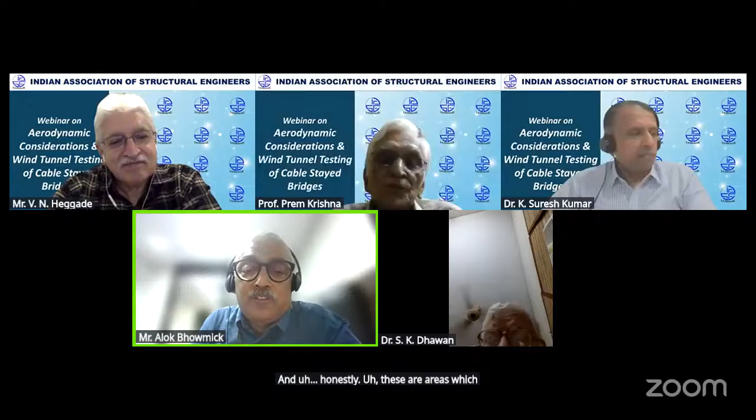I think nothing much to add. Actually, I'm awestruck with the kind of presentation that I heard from both experts, and of course, I have heard both of them earlier also. A lot of it we deliberated during the preparation of the guideline on cable stayed bridges and extradosed bridges in IRC SP 136, which Professor Prem Krishna talked about. And honestly, these are areas which are the future for bridge engineers. Most of us are not very well conversant with the aerodynamic calculations and what all we need to take care of. Whatever Professor Prem Krishna ji and Dr. Suresh mentioned today, I think the majority of us are uninitiated on that. In times to come, we will see more and more cable stayed bridges and more application of these concepts in design.

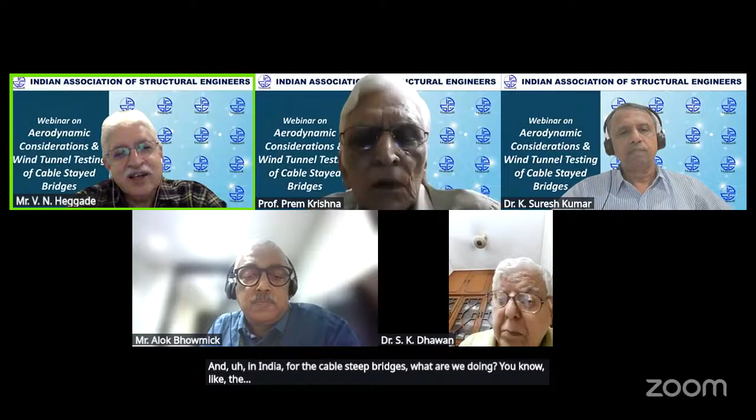I think international practice has already been explained by Dr. K. Suresh Kumar. And in India, for cable stayed bridges, what are we doing? It's an interesting question, in fact. The buffeting effect is added to the static effects, and after that, whether you do the ultimate limit state check or the serviceability limit state. SLS is the one which we normally do for extradosed bridges, I am aware of it. I am not sure whether it has to be considered under the ultimate limit state.

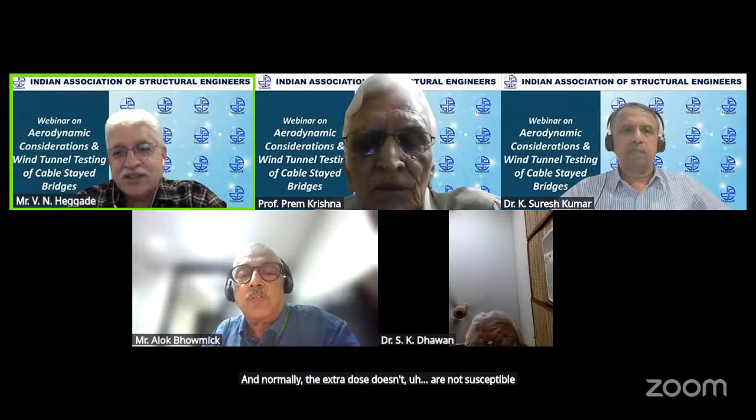For extradosed bridges, would you normally carry out a buffeting analysis? We only check the empirical equation which has been given. And normally extradosed bridges are not susceptible to buffeting. But in the case of cable stayed bridges, certainly it is susceptible to buffeting. But once the buffeting analysis is done, do we not change the cross section so that buffeting doesn't occur? Is that not the procedure? No. Buffeting will occur. Okay. Buffeting will occur.

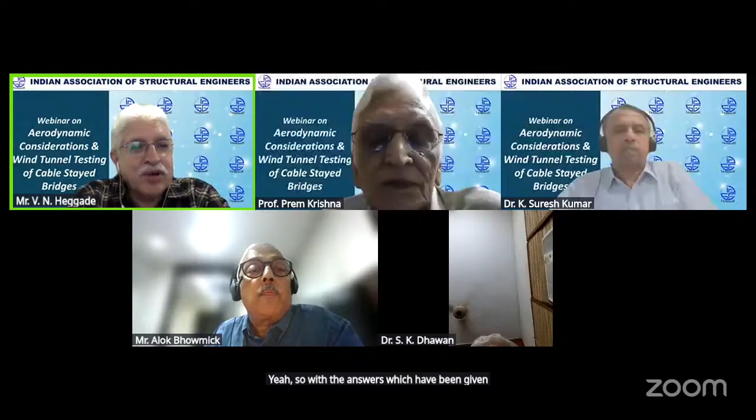You can get a much better idea of the gust factor, for example, from buffeting analysis, compared to all the empirical values that we are going around with. So with the answers which have been given, Mr. Kuriakose, what I understand is it is basically a serviceability limit state, SLS, as well as the fatigue limit state. It is not an ultimate limit state. That's what I understand from the discussion so far. But I think it's an interesting question, and this question will be looked into by our codal committee now.

Since you have raised it, it's a very interesting question. We'll have to really look into it and see what is to be prescribed in our code. Thank you for asking this question. Suresh, would you like to add to this?

What I'm trying to say is that for all the bridges we do, at least in India, for buffeting we always give a 100-year load, and we also give a serviceability load. But after that, definitely we consider factor of safety. That means factor of safety is more like taking the 100-year load to ultimate limit state. You're just multiplying it. That's the way we have been doing it since we don't have 700 or 1700-year speeds in the code.

So design is considered for ultimate limit state only, but serviceability, fatigue, and other things obviously use a lower return period. So a lower return period will be used for fatigue and serviceability. It's an interesting and very good question. I think we certainly will look into that.

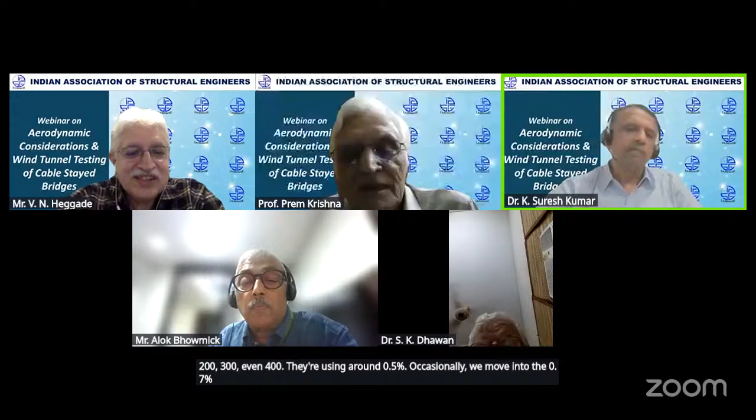As far as bridges are concerned, for very long span bridges we consider 0.3% damping most of the time for testing, typically 0.3%. But for the ranges we're doing in India, spans of the order of 100, 200, 300, even 400 meters, they're using around 0.5%, occasionally moving into the 0.7% region. These are all concrete decks. And if it's a steel deck, then things go even lower.

So once - well, what can I say - if there is any requirement for a damper on a bridge, then you will come to know the exact damping of the bridge, because we will not install any damper without checking the actual damping. We will excite the bridge, do some on-site monitoring, and then decide what extra damping is required to arrest the motions. But in other cases we typically don't go after this unless we're asked to do so. These ranges are fairly good, I would say, and we've never experienced any issues.

There's another question from Mr. Kuriakose, who seems to have a lot of questions regarding buffeting analysis. This question may require a lot of time - perhaps another webinar is required. He asks: please explain the process of performing buffeting analysis where correlated wind time histories are applied along the deck and along the pylon, performing buffeting analysis in the time domain, and also compare it to the simplified equivalent quasi-static load method of buffeting. I read that question and thought, yes, maybe another webinar is needed.

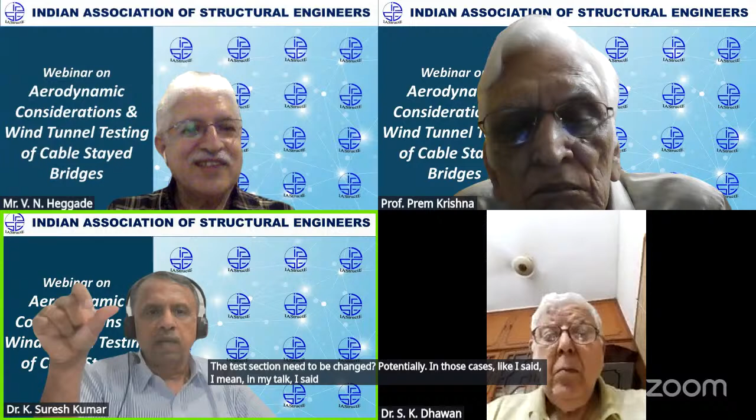We will come to know if very large vortex shedding is happening, whether the test section needs to be changed potentially. In those cases, like I said in my talk, desktop assessment comes along with the CFD. At the assessment stage, we'll also use some CFD to figure out whether any issue is anticipated. So that's the only time we use CFD. Afterwards, there's no CFD.

There's an interesting question from Mr. Telanga, I think it's for you, Dr. Prem Krishna. He says that as per IRC 136, you are using for the dynamic effects a 3-second gust average, whereas other international codes use the 10-minute mean velocity.

Is that okay? I don't think so. I think you said mean hourly for the dynamic, right? Mean hourly, yes, not the gust.

So the second question is from Mr. Sunai: do we have wind tunnel testing facilities in India? What would be the cost towards wind tunnel testing for a typical long span bridge?

I think there are many facilities for wind tunnel testing. RWDI has also established one under the stewardship of Dr. Suresh Kumar in Trivandrum. I think they have been doing a lot of wind tunnel testing. I don't know as far as the cost is concerned for a typical long span bridge. I think it depends on the sectional model test, the complications and everything, so we cannot generalize it.